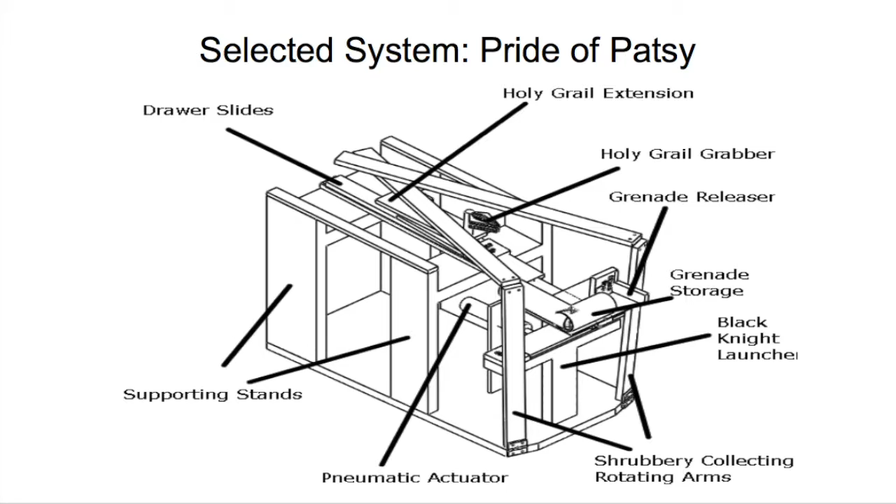The selected system is the Pride of Patsy. This device has a pneumatic actuator and DC motor-powered subsystem to collect shrubbery. When the machine is activated, the pneumatic actuator extends, hitting the shrubbery-collecting rotating arms onto the competition track. A string attached to the middle of the arms is retracted using a DC motor to pull the arms toward the edge of the track, thereby securing the shrubbery.

The extension of the pneumatic actuator also causes the arm holding the Black Knight launcher to fall. When the launcher hits the track, a lever arm is triggered to sweep the Black Knight out of the home zone. The drawer slide mounted on top of the supporting stands is gravity-powered and extends to the beast's lair. The extension of the drawer slide is triggered by the rotation of a DC motor that releases the tension in a string attached to the back of the drawer slide.

When the drawer slide is fully extended, the rotating walls of the beast's lair pull the lever arm on the grenade release mechanism. As a result, the arm pushes the first grenade from the grenade storage tube into the beast's lair. When the shrubbery-collecting rotating arms are released and the drawer slide extends, the mousetrap at the base of the Holy Grail grabber is released and rotates forward to secure the Holy Grail.

In order to retract back from the beast's lair, the DC motor attached to the drawer slide activates and pulls the drawer slide backwards. In subsystem competitions, the shrubbery collector was capable of collecting 3 shrubs per round when properly set up, and the Black Knight mechanism was successful 1 for 3.

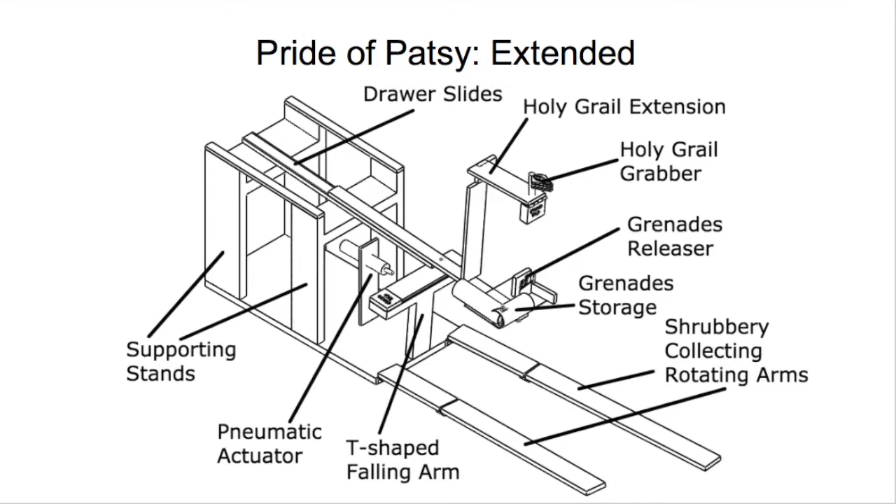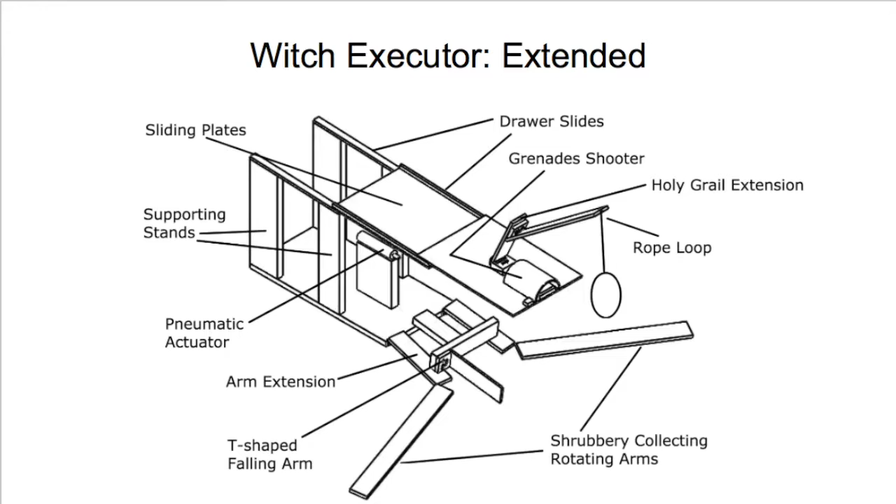The first alternative is the Witch Executor. This design uses very similar Black Knight and shrubbery subsystems. Key differences are the use of sliding plates for extension to the beast's lair and support for Holy Grail and grenade mechanisms. Additionally, an IR sensor detects when the rotating walls pass, and the pneumatic actuator extends into the grenade shooter apparatus to hit a ping pong ball into the beast's lair. The mousetrap on the Holy Grail extension powers a rope loop that loops around the grail before the motor retracts it back into the home zone.

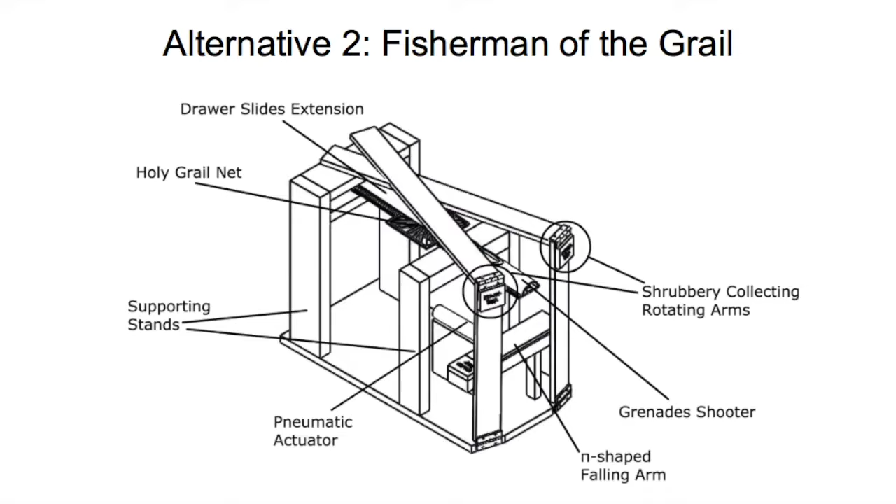The Fisherman of the Grail design similarly uses the pneumatic actuators and DC motors. The shrubbery collecting rotating arms are the same as the Pride of Patsy. The falling arm for the Black Knight is powered the same way, but instead is π-shaped. The grenades in this case are pushed by a pneumatic actuator that is activated at every given time interval based on the average speed of the lair's rotation. A mousetrap shoots the Holy Grail net at a certain angle to catch the Holy Grail before the drawer slides are retracted by the motor.

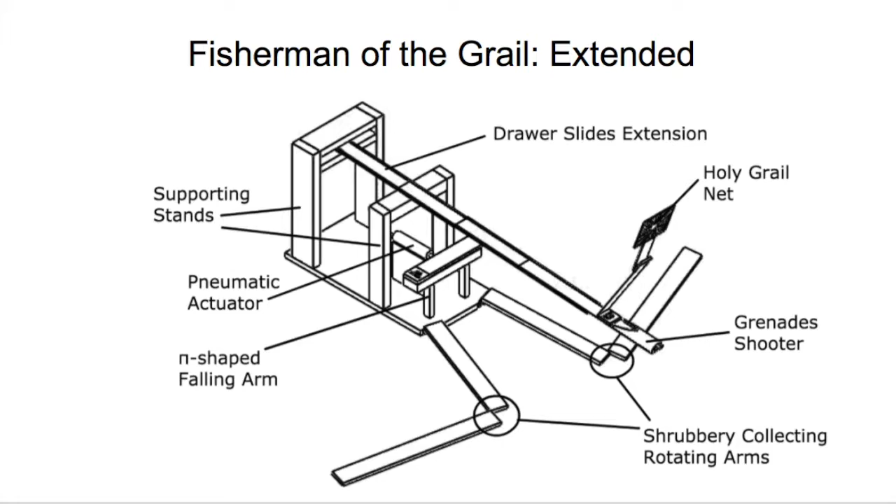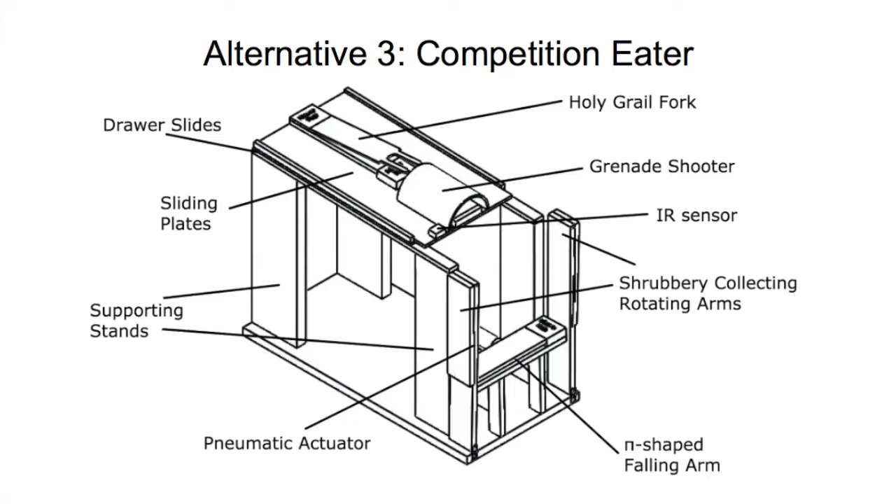The Competition Eater differs from other alternatives in that the shrubbery collecting rotating arms fold down on themselves instead of resting atop the sliding plates or support stands. The pneumatic actuator and motor power the Black Knight and shrubbery subsystems much the same as previous alternatives. Meanwhile, another motor will let go of the sliding plates to slide near the beast's lair to release grenades. A grenade will be shot by a pneumatic actuator every time the IR sensor senses the rotating walls passing it.

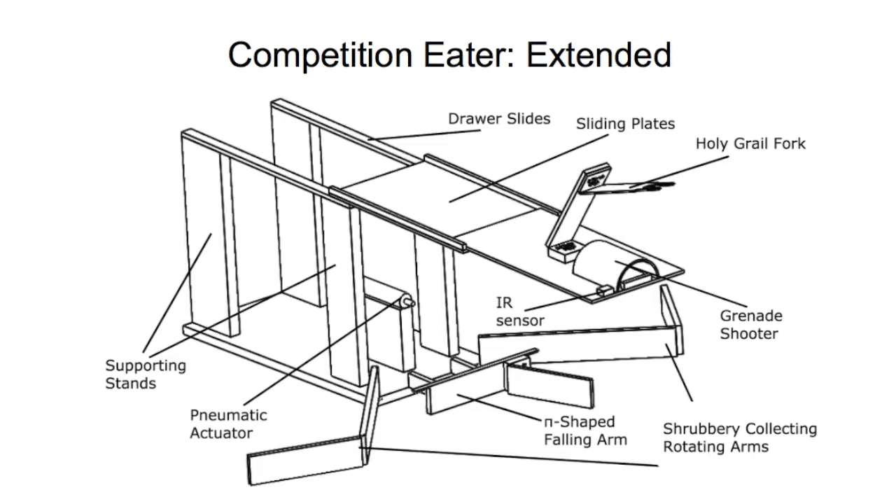When the pneumatic actuator activates, it will pull the string that is connected to the Holy Grail fork to release it. The Holy Grail fork will stretch out to fork the Holy Grail. Both the Grail and the sliding plates will be retrieved back to the home zone with the motor.

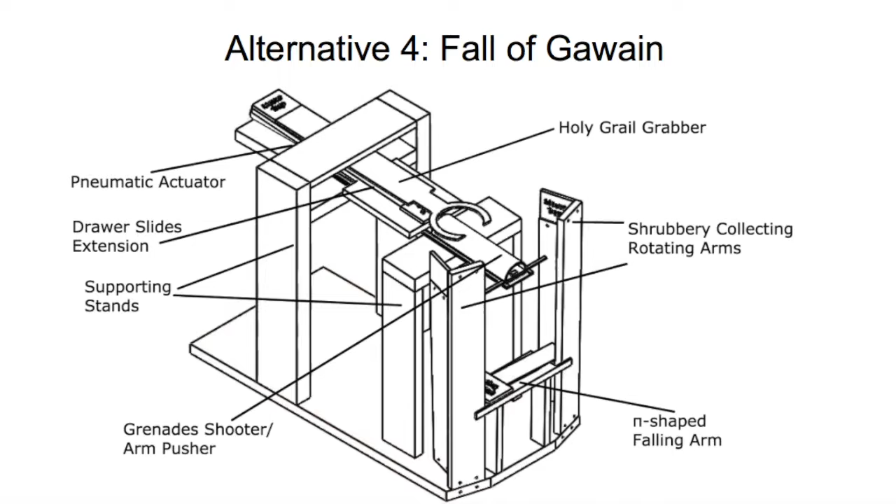The Fall of Gawain uses a pneumatic actuator mounted behind the drawer slides to extend the Holy Grail grabber and grenade shooter to the beast's lair, and to push the shrubbery collecting rotating arms and n-shaped falling arm in a single motion. The Holy Grail grabber has a mousetrap arm system that flings forward as the drawer slides extend. The claw-like grabber fits over the Holy Grail and lifts it to the home zone.

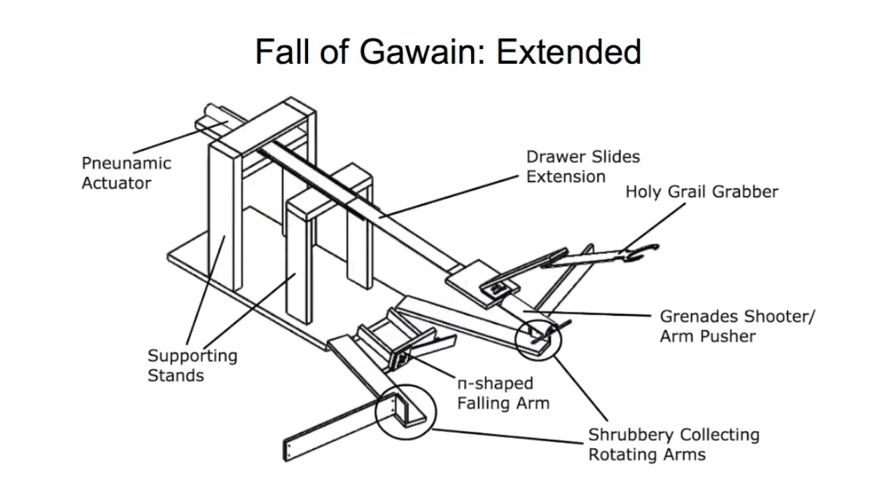The grenade shooting system works with a switch attached to the end of the frontmost part of the machine and is pushed as the rotating wall of the lair moves over the switch, activating a pneumatic actuator and shooting a grenade. The motor is used to retract from the blast zone.

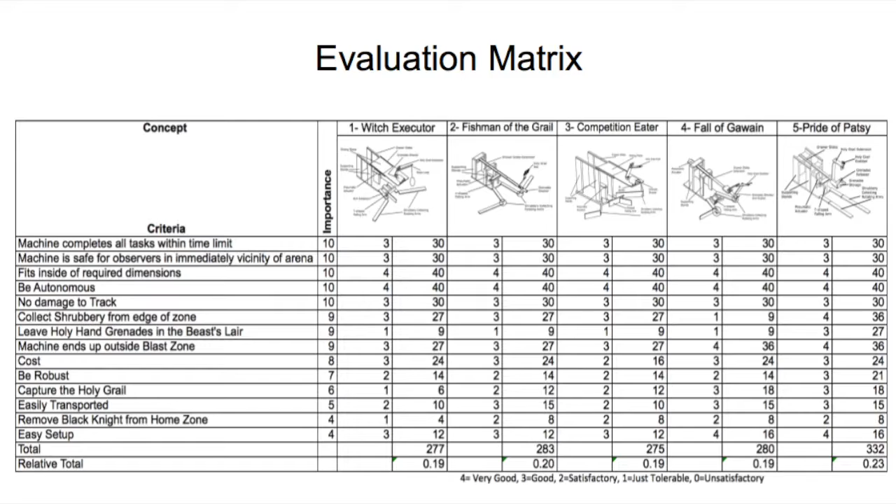Scores on the evaluation matrix correlate with how well the design concept satisfies the customer needs and are weighted by importance. Concept 5, the Pride of Patsy, was determined to best satisfy important requirements. It is the most consistent across criteria and outperforms the others in collecting shrubbery, leaving the holy hand grenades in the beast's lair, and being robust.

The quickest power sources, the pneumatic actuators, are used to release the arms for shrubbery collection and extend for the Holy Grail, the most time-critical tasks. The angled arms also aid in reducing time spent collecting shrubbery. This design uses a lever that is pushed by the rotating beast's lair to release the grenades, instead of relying on a timer or IR sensor. This improves consistency and increases grenade accuracy.

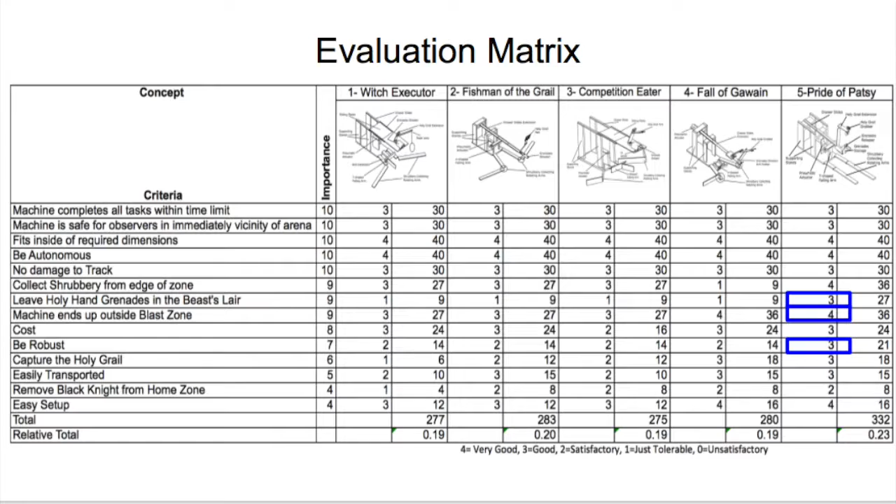Robustness is aided by the use of more reliable sources such as pneumatic actuators and motors instead of solenoids while minimizing mousetraps. To conclude, the objective of this device is to best accomplish given tasks to earn as many points as possible. 5 designs were created, an evaluation matrix was used to compare how well each design satisfied customer needs, and the Pride of Patsy was selected. This design is expected to perform better than the 4 alternatives at accomplishing tasks to maximize point earning potential. Opponents, prepare to meet your fate.